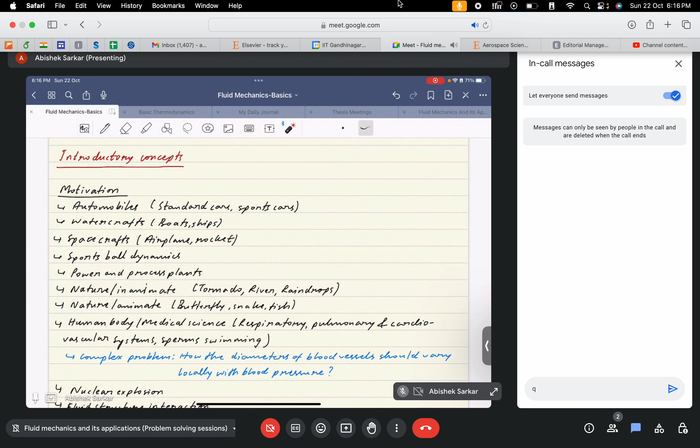I'm considering this a special session rather than a problem-solving session. This can be considered a revision session for the entire course, fluid mechanics and its applications. For today's session, I'll be revising the concepts we've discussed, touching upon important parts of the course so it helps with recapitulation—if you have time to watch a 1 to 1.5 hour video before your final exams, you can easily tackle the conceptual questions in that exam.

So with that idea in mind, I'll go through the concepts and revise the entire course as much as possible within the given time frame. If any of you have any doubt in between, you can just ask and we can discuss about it.

So to start with, we discussed the vast applicability of fluid mechanics in our day-to-day life, starting with the obvious examples such as automobiles, watercrafts, spacecrafts, sports ball dynamics and sports in general, then process and power plants.

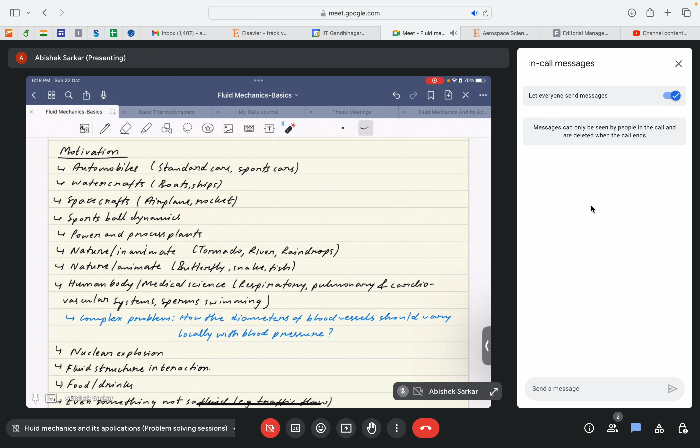Even some examples are difficult for a beginner or a layman to understand—that the concepts of fluid mechanics are still applicable in those areas. For example, in the case of the human body, nuclear explosions, food and drinks, and even something that's not so fluid, like traffic flow.

You will eventually see how even traffic flow, or the movement of cars in congested traffic, can also be modeled by understanding the concept of fluid mechanics—or rather, I must say, by understanding the concept of conservation laws.

So as a fundamental beginning thought process, to tackle any fluid mechanics problem—not with the understanding that you'll be able to completely solve it, but if you're trying to tackle it and don't have any idea how to approach it—I'll give you a trick to solve any kind of fluid flow problem: approach such problems by imposing the concept of conservation.

And by conservation I imply mass conservation, momentum conservation, and energy conservation.

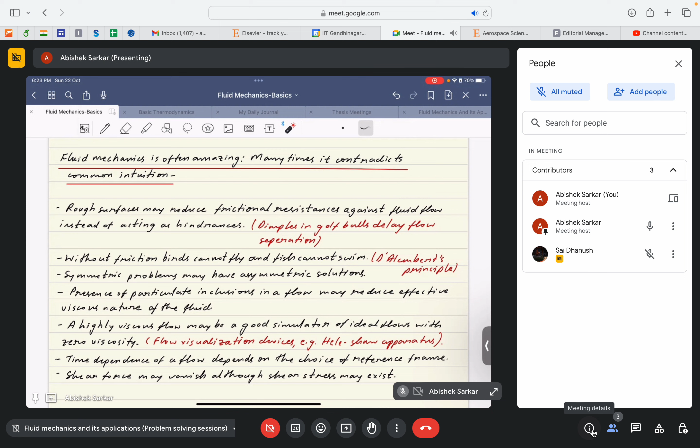So there were many terminologies that we discussed, but the first one we thoroughly discussed was the concept of continuum or continuum hypothesis. It basically means that for the applicability of the governing equations we devise for understanding fluid mechanics, that is the partial differential equations we devise for modeling fluid flows, are only applicable when the domain over which these equations are applied is continuous. And if viewed through the eyes of a layman, and considering the fluid domain to be an accumulation of small fluid particles, then the concept of continuum or the continuous nature of the domain becomes a question, right?

So, but again, as we saw, there are certain parameters we need to consider before concluding whether the continuum hypothesis can be imposed or not. The first term we discussed was the concept of Knudsen number, where the Knudsen number is given by the ratio of lambda by L, where lambda signified the mean free path of the fluid particles, and L referred to the characteristic length scale of the fluid domain. We saw that if this Knudsen number is much less than 1, then the system can be considered densely packed, and the continuum hypothesis can be easily applied.

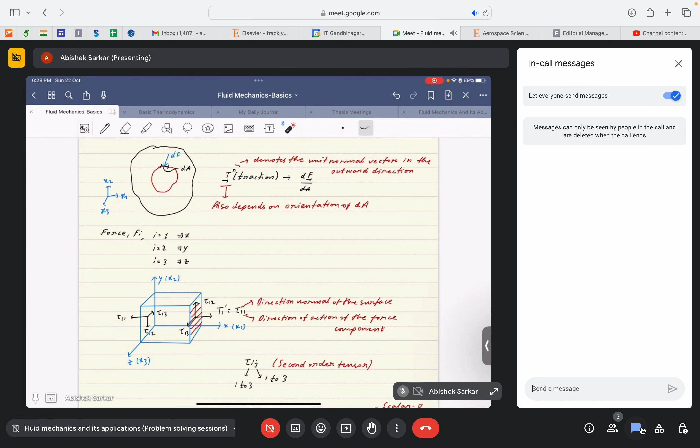So after that we basically discussed the shear stresses or the traction vector, where the traction vector is devised to represent the shear stresses that act on a fluid element in a particular direction, and that can in turn be used to define the surface force in a particular coordinate axis or direction. That's how the traction vector was defined.

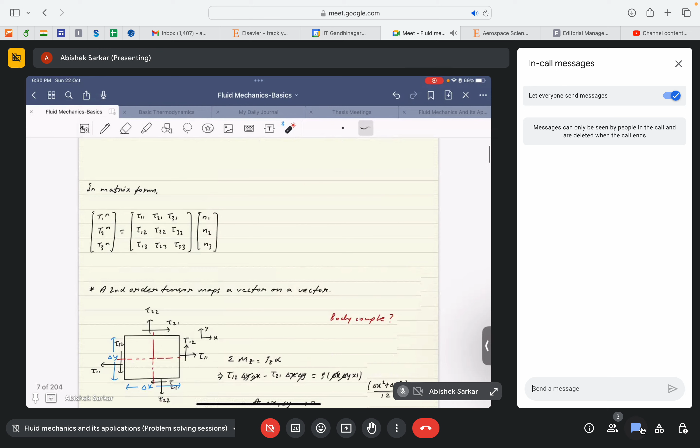And then I guess we will directly jump to the concept of pressure, where we discussed Pascal's law, which stated that the net pressure force is transmitted equally in all directions. That was Pascal's law, and we also discussed the concept of mechanical pressure and how it is different from thermodynamic pressure.

So the mechanical pressure is basically defined as the negative of the mean of the normal stresses that act on the fluid element. We also saw that in general the mechanical pressure is equal to the thermodynamic pressure. So Pm is in general equal to P thermodynamic.

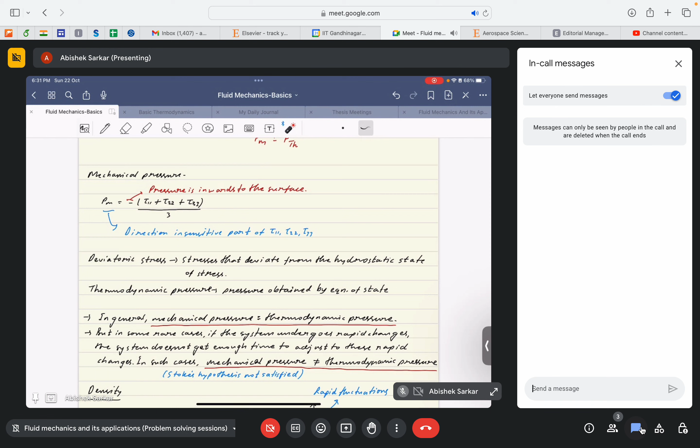But there are certain instances where this equation becomes invalid. Those instances arise when the system undergoes rapid changes, like if the forcing term or forcing scenario is such that it results in rapid changes of fluid properties in the flow domain, and the system is not able to cope up with this rapid change. In that scenario, this equation fails and is no longer valid.

And we will eventually see that this is actually an outcome of the Stokes hypothesis, where the scenario in which the Stokes hypothesis becomes valid or invalid determines when this equation is valid. When the Stokes hypothesis is valid, meaning mu, or the second coefficient of viscosity represented by lambda, is equal to minus two-thirds mu, or the fluid is incompressible, only in those scenarios does this equation become valid. We'll discuss that more when we get to the fluid dynamics part.

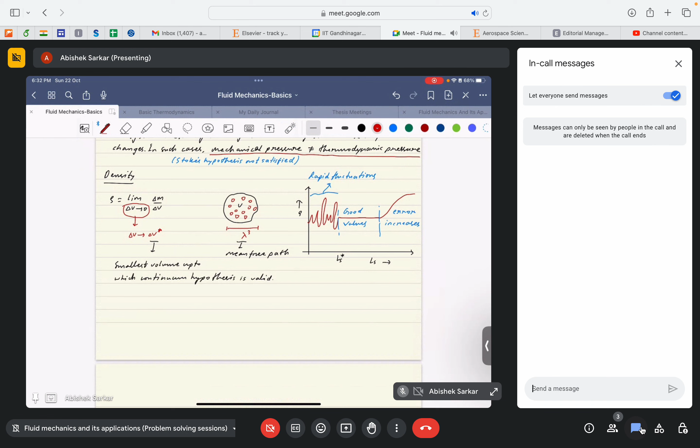Then I guess we discussed the concept of density, and how the continuum hypothesis is also imposed while defining the concept of density. I don't think I need to repeat that, it's quite simple and self-explanatory. This diagram explains everything quite properly, so I don't need to revise it again.

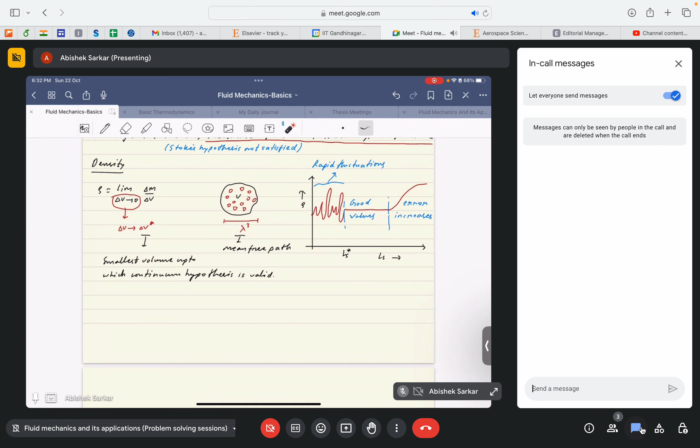So now there's an important concept, the bulk modulus. It's basically defined by this expression: the ratio of the change in pressure divided by the change in the net volumetric strain. Sorry if I mispronounced or misstated the definition. So the bulk modulus is defined as the ratio of change in pressure over the net volumetric strain.

And in the context of compressible and incompressible flow, could anyone please tell what this signifies? For incompressible flow, what must be the value of K? Should it be very high or very low?

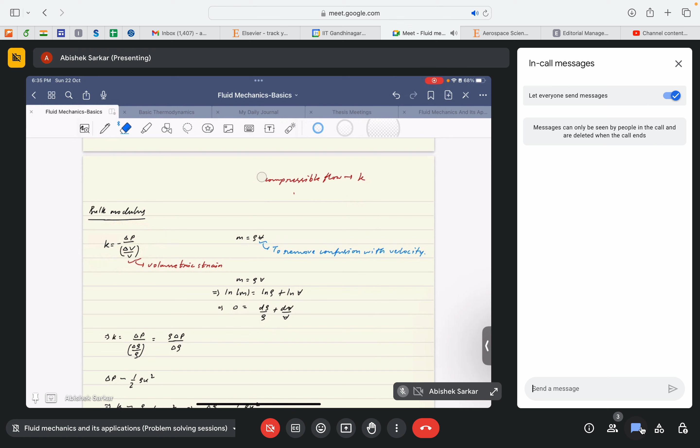We also saw the concept of Mach number, where Mach number is basically the ratio of the flow velocity over the speed of sound in that particular fluid domain. That was the definition of Mach number, and we saw that if the net change in density in the fluid flow is less than 5%, then that kind of fluid flow can be effectively considered to be incompressible. So these are the limits where the compressible and incompressible nature of the fluid flow comes into the picture.

So compressible flow can itself be considered a different subject completely, where we'll see how the very fundamental understanding of fluid mechanics contradicts the usual observation. Not always, but there are certain scenarios where the fluid behaves in a completely different way than in the subsonic regime. This abrupt change in the behavior of fluids is very much governed by this parameter known as the Mach number. If Mach number is larger than 1, or basically in the supersonic regime, the fluid behaves differently compared to when it's in the subsonic regime. This change in characteristics is governed by the Mach number of the fluid flow. This is important, but if you're interested, you can look up the compressible flow chapter of any standard fluid mechanics book for more understanding.

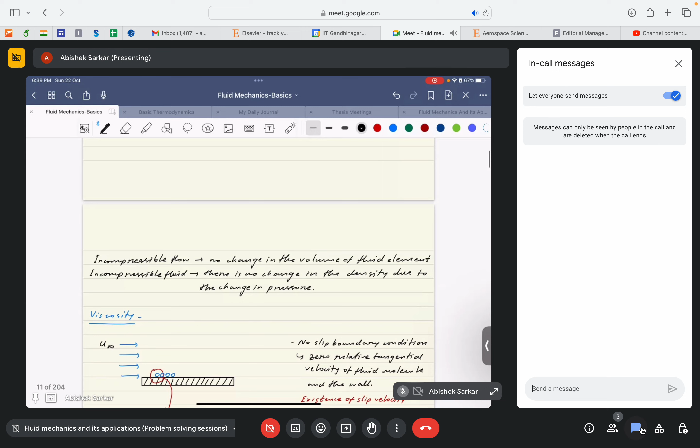So then we stumbled upon the concept of viscosity, which is again very crucial, at least in the context of subsonic flow regime, or basically for this course where we are mainly dealing completely in the subsonic regime. Viscosity by its very nature inherently opposes the direction of the flow. Similar to friction in solids, where friction of surfaces opposes the direction of motion of the object above it, you can understand viscosity as a frictional resistance in the case of fluid flow, where it resists the motion of fluid over a particular surface.

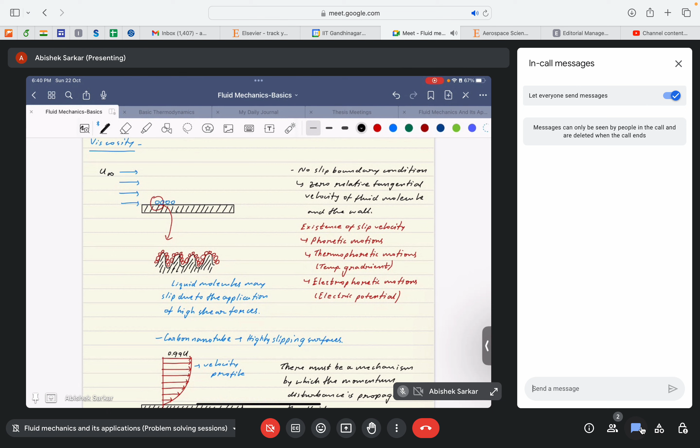In scenarios where we consider the fluid to be viscous, the no-slip boundary condition remains valid. This implies that the net tangential velocity above the surface would be equal to 0 at the wall. So if we consider this to be the wall, the net tangential velocity above this wall can be considered to be 0 in the case of viscous flows.

We also saw, while discussing Euler's equation or the potential flow regime, that this no-slip boundary condition becomes invalid because the governing equations become singularly perturbed. The second order terms are removed since we're not considering the viscous nature of the fluid flow. So the sets of boundary conditions defined by the second order nature of the governing equation become invalid, and only one set remains: the no-penetration boundary condition, in the case of potential flows.

I won't go too deep, but there was one very important concept regarding non-viscous fluids and inviscid flow. The thing is, there is no fluid in this entire world which has viscosity equal to 0. If somebody tells you the viscosity of the fluid can be taken to be 0, that's completely rubbish. There is no physical meaning to that statement. Viscosity is a property of the fluid, so if there is a fluid, and if you are defining a fluid, there must be a certain viscosity. We cannot say the viscosity of a fluid is 0.

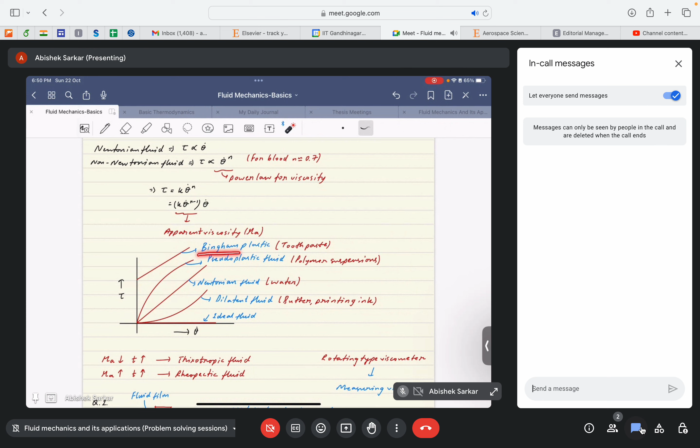So it's also a non-Newtonian trend, even though the trend of variation is the same, but it's different from water. There is a certain threshold for shear stress that has to be crossed for the fluid to start moving. This is basically what is meant by Bingham plastic. I guess we can move ahead.

Let's take this example based on the viscosity of fluid. This setup is for flow between two cylinders, considered a specific setup, and such flows are known as Taylor-Couette flows - basically flow between two rotating cylinders. In this question specifically, the outer cylinder is moving with angular velocity omega, and the inner cylinder is fixed, where the radius of the inner cylinder is r1 and the radius of the outer cylinder is r2.

So in this question, we are asked to find an expression for M, the net moment required to rotate the inner cylinder against the resistive forces because of the viscosity of the fluid within this confinement. We need to find the expression for the net moment required to move this inner cylinder.

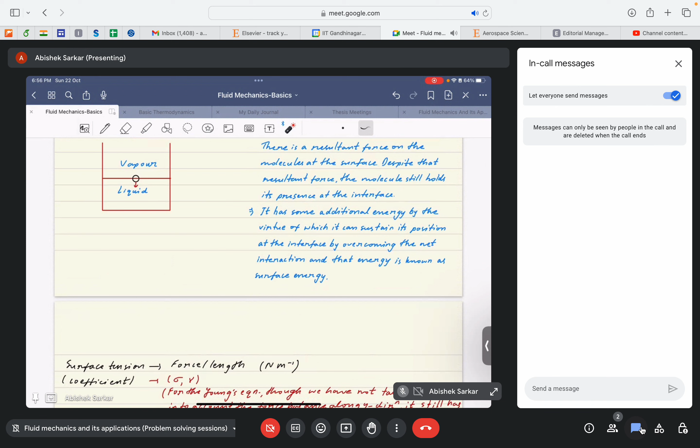Surface tension is the net force per unit length required to resist this breakage of these liquid bubbles, and such forces per unit length is defined as surface tension, which is denoted as sigma.

Then we looked at some specific cases for the expression for excess pressure. For example, for the case of a spherical droplet, the expression for excess pressure was given by 2 sigma by r, where r is the radius of the bubble. Then in the case of a spherical bubble, the excess pressure was given by 4 sigma by r — just twice the value of excess pressure for a spherical droplet.

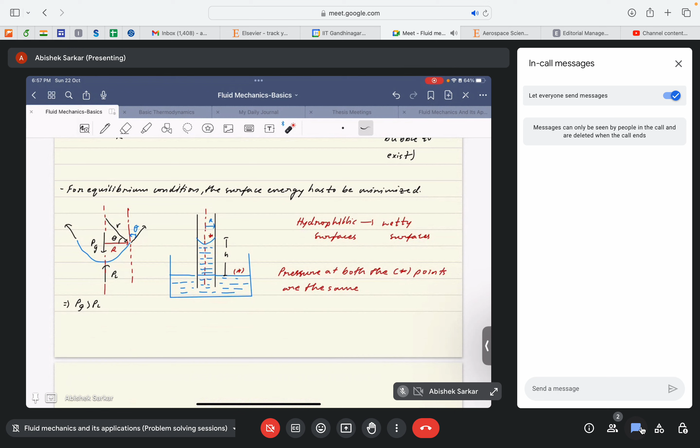Finally, we saw the application of surface tension in the case of capillary rise, where the expression for the capillary rise was given by h equals 2 sigma cos theta by rho g r, where r is the radius of the capillary tube. This applies in the case where the meniscus is under static equilibrium, and the contact angle is acute.

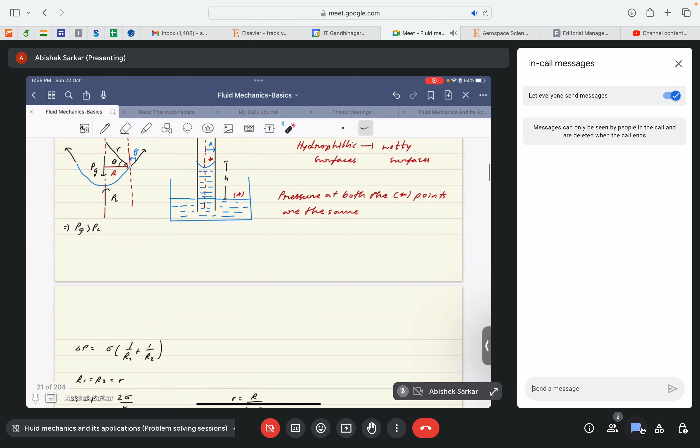I will just cross verify — yes, the contact angle is acute. So if it is greater than 90 degrees, then the expression changes, and it is given by this expression.

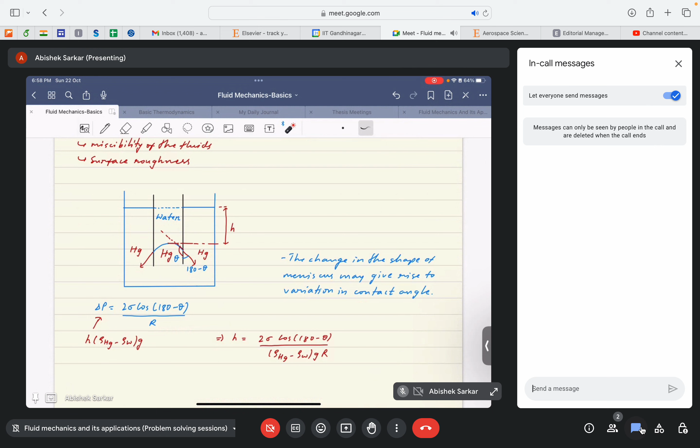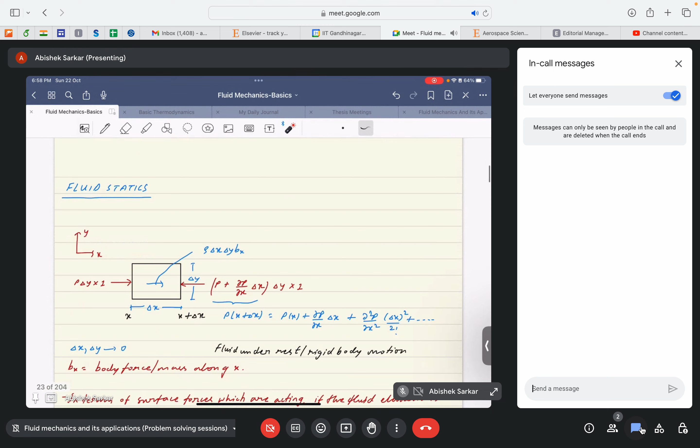Now we discuss fluid statics. We started with the hydrostatic law, which basically gives the expression for how, if the fluid is static, the pressure varies along the depth in the fluid.

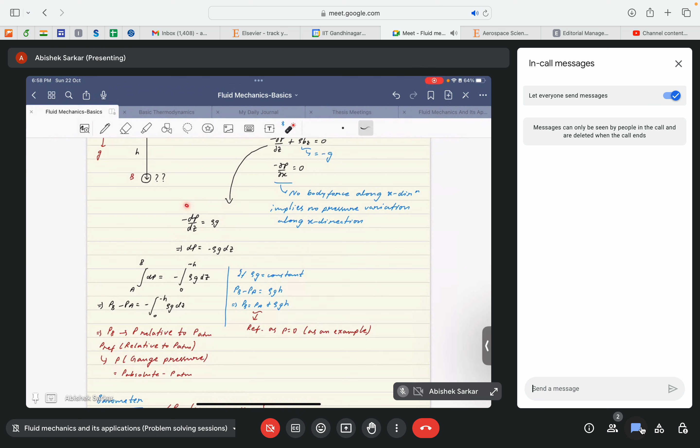This expression also helped us define the concepts of relative pressure and gauge pressure, atmospheric pressure, absolute pressure, where gauge pressure is basically the difference between the absolute pressure and the atmospheric pressure.

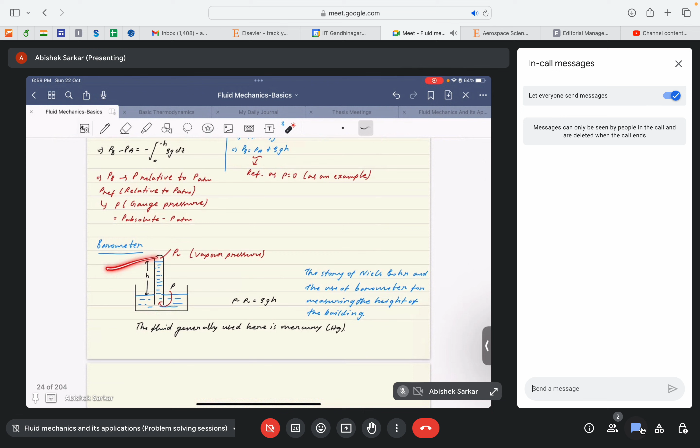Then we also discussed different pressure measuring devices such as barometers, manometers, and piezometers, and most extensively we discussed the working principle of manometers, and we also saw various problems.

In the case of manometers, initially it may seem very complex and difficult, but in reality it's very simple. It's basically the balance of pressure about a certain datum point.

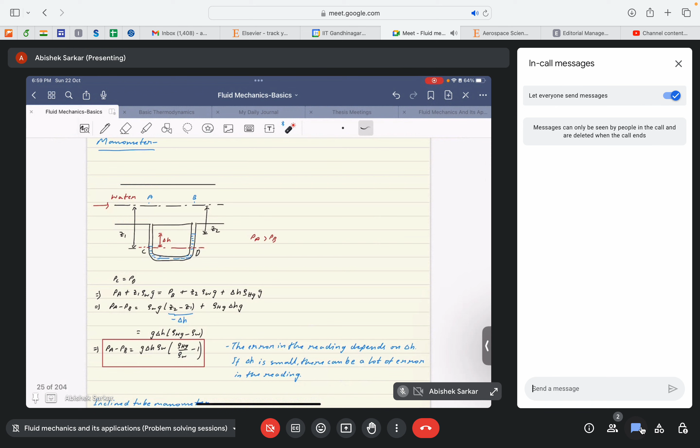Let's consider this example. If you want to measure the pressure difference between these two points A and B, this pressure difference arises because of the incoming flow. Or, since you already know, you can tell this flow is actually generated because of the pressure difference.

This is basically the negative pressure gradient. If dp by dx is negative, there will be flow in the positive x direction, as we discussed thoroughly while deriving the exact solution of the Navier-Stokes equation.

We also discussed, while covering boundary separation, how the presence of a negative pressure gradient resembles a favorable flow condition with no boundary separation, and in the case of adverse pressure gradients, where the pressure gradient is positive, it may result in flow separation in the boundary layers.

I'm telling you this because you have already covered the entire course, so this is understandable. We initially didn't discuss it because we hadn't reached that point, but since we've now completed the entire course, for revision it's good to correlate the different concepts we discussed throughout.

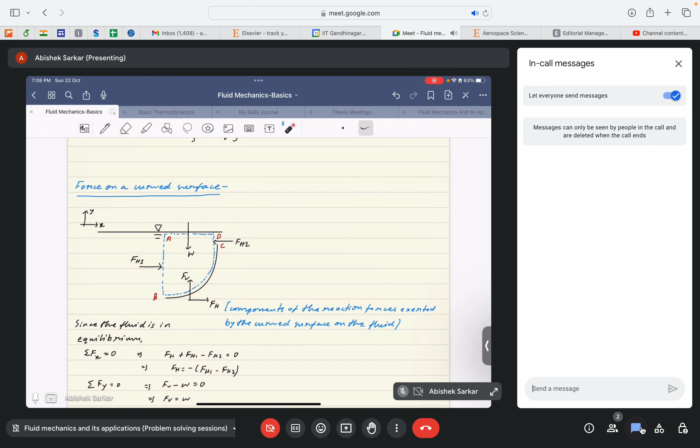For the net vertical forces, it's much simpler: the net vertical force is exactly equal to the net fluid weight supported by this curved surface. This is one of the crucial points we follow before solving problems based on net forces acting on a curved surface.

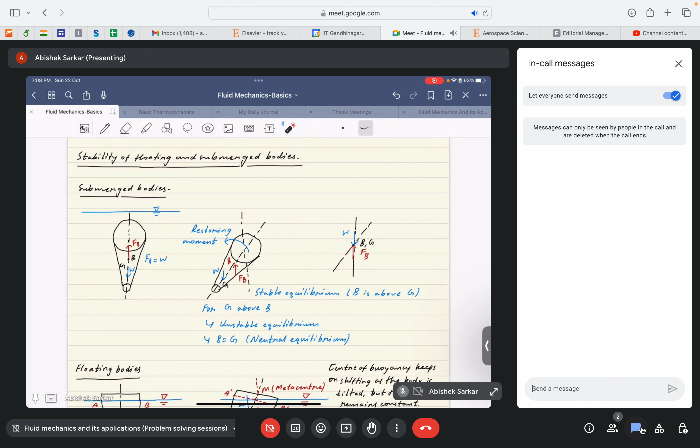We also discussed the stability of floating and submerged bodies. In the case of floating bodies, the concept of metacenter came into picture.

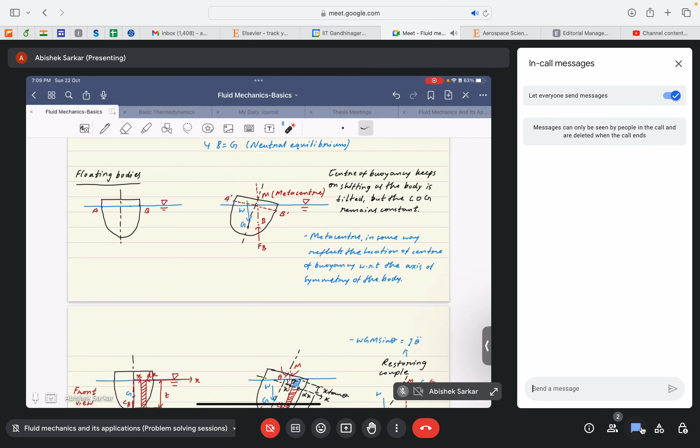I won't define metacenter again, but if there's a crucial 1 or 2 mark question, stability is determined by the metacenter of the body. For stability of floating bodies, the metacenter should lie above the center of gravity of the object. If M is above G, the floating body is considered stable. If the metacenter is below G, the floating body is unstable. And if the metacenter coincides with the center of gravity, the body is neutrally stable, tending to remain in that particular orientation throughout its motion.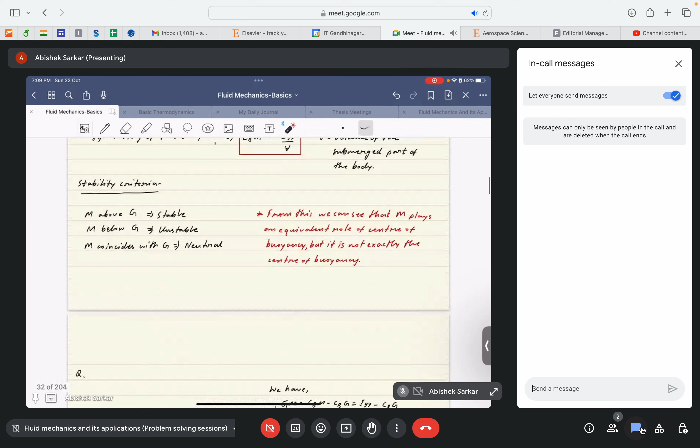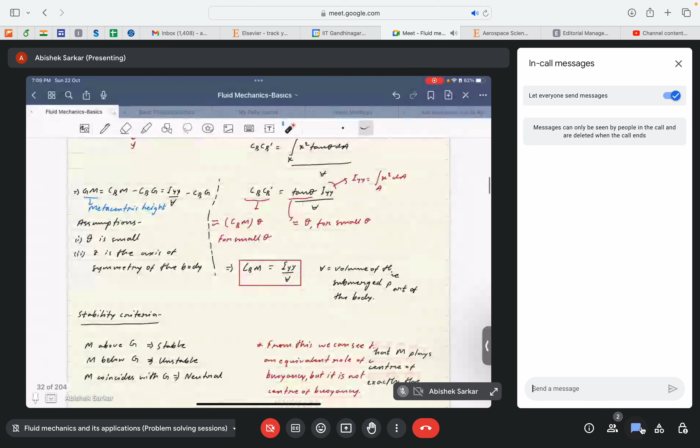For metacenter, we follow this expression - the metacentric height or metacenter is given by this expression. Then I guess we can move forward and discuss other topics because time is limited, so we need to cover many topics.

Now we come into the fluid kinematics part. This is a very important topic where we discuss the concept of streamlines, streak lines, and path lines - basically the flow visualization part. We saw how flow is visualized with the help of different imaginary as well as real lines. In our context, the imaginary lines were the streamlines, and the real lines were the streak lines.

We saw how these different kinds of lines help in the visualization of the flow field, and we also saw that in the case of steady flows, the streamlines, streak lines, and path lines coincide with each other and are identical. We also discussed steady and unsteady flows and their basic definitions, so I won't go over that again.

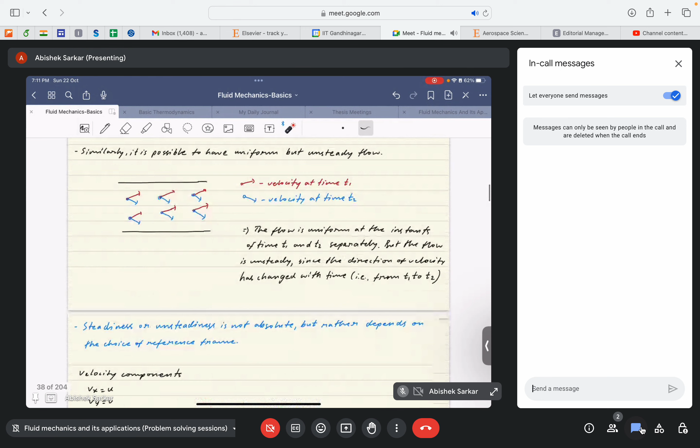While discussing streamlines - by definition, streamlines are the imaginary lines in the flow field such that the tangent to these lines at any point represents the net velocity of the fluid particle at that point, at that given instant of time. These are instantaneous lines, not time-averaged lines, but lines that change at every particular instant of visualization. More importantly, these are imaginary lines.

So in general, if you're observing certain lines because of the application of dye in a particular flow, these are not streamlines, but are actually streak lines. This is seen by the definition that a streak line is the locus of all fluid particles which at some prior instant of time passed through a common point. The famous experiment of Reynolds, where he used dye to visualize the motion of fluid particles in that tube - those lines were actually streak lines, not streamlines. These are not to be confused.

But he conducted his experiments in a very properly designed environment where there were no high degree of perturbations in the flow field, and the flow can effectively be considered steady. In those scenarios, we can tell that the streamlines, streak lines, and path lines coincide with each other, and we can say that the streak lines we observed are the same as the streamlines of the flow field. So that's the scenario.

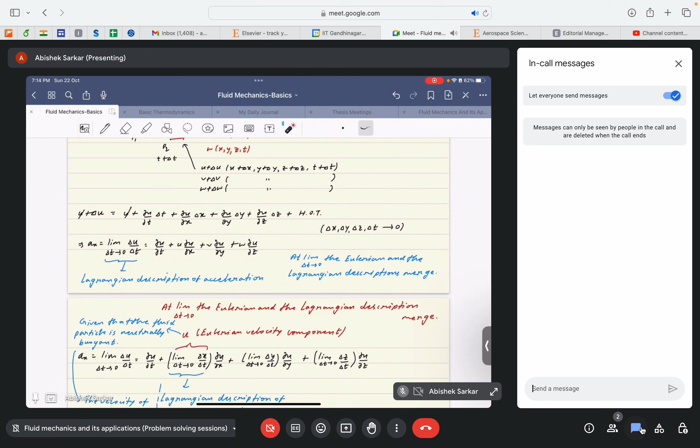Okay, so we then again saw the equivalence of the Eulerian and Lagrangian approach, but I don't think we have enough time to discuss through everything.

Since the concept of total derivative came into picture, the total derivative was defined as a particular mathematical operator, given by the complete derivative d by dt, which was the sum of the local derivative dou by dou t plus the term v dot nabla, where nabla denotes the operator given by nabla equals dou by dou x i-cap plus dou by dou y j-cap plus dou by dou z k-cap. Okay, this expression.

But one more key point, this expression is in vector form, so it's valid for any coordinate system. But if we are considering a Cartesian coordinate system, then this is what the expression for complete derivative is. If you consider a different coordinate system, like cylindrical or spherical, then the expression for v dot nabla will change accordingly, because of the definition of the nabla operator in different coordinate systems.

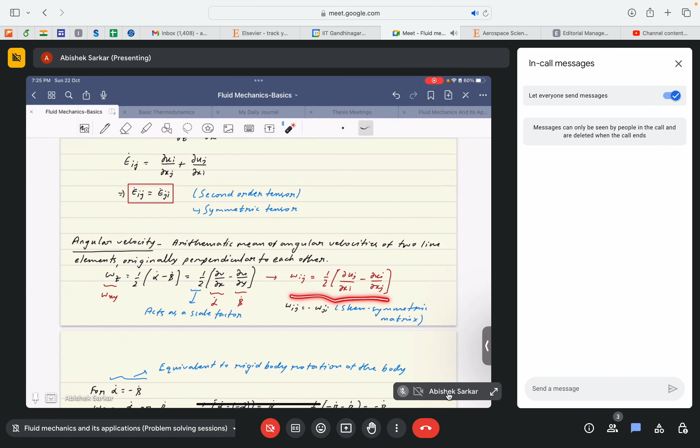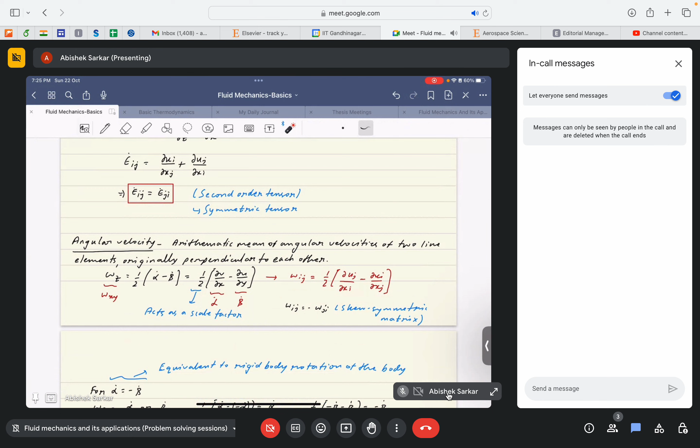This expression is actually the index notation for all the nine elements in the tensor for the angular velocity as well as the linear angular strain rate. For right now, for the context of this course, I don't think it's necessary to understand the index notation, but these are the index notation for the various elements of the angular velocity tensor as well as the shear strain rate tensor.

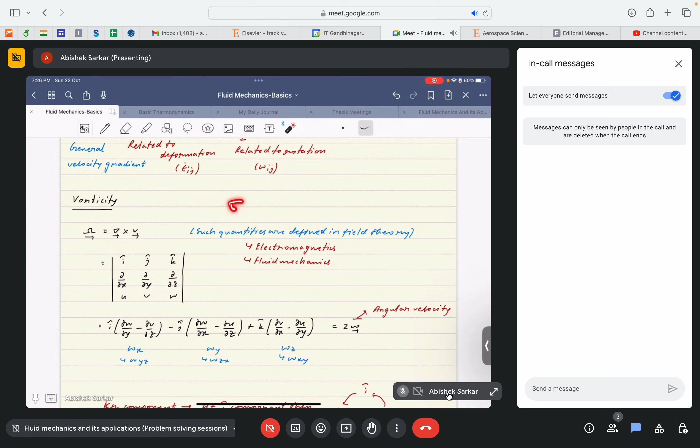Then again we discuss vorticity, where vorticity is given by the curl of the velocity field. If the flow field is irrotational, then the value of the vorticity would be equal to 0, basically del cross V equal to 0, where del is the nabla operator.

We also discussed a very important concept, the stream function, which is valid for a steady incompressible 2D fluid flow. In the case of a 2D incompressible fluid flow, the mass conservation equation takes the form dou u by dou x plus dou v by dou y equal to 0 — like any of the two, u or v, v or w, or u or w — but say w is equal to 0 in this context, then the mass conservation equation takes this form.

Also, since it's incompressible, dou rho by dou t is equal to 0. Keeping that in mind, if in this equation we substitute u equals dou psi by dou y and v equals minus dou psi by dou x, then this equation would inherently satisfy the mass conservation, and thus we can define the net flow field in terms of a single variable which is a function of x and y. I'll reiterate that the existence of a stream function is only valid for a 2D incompressible flow field.

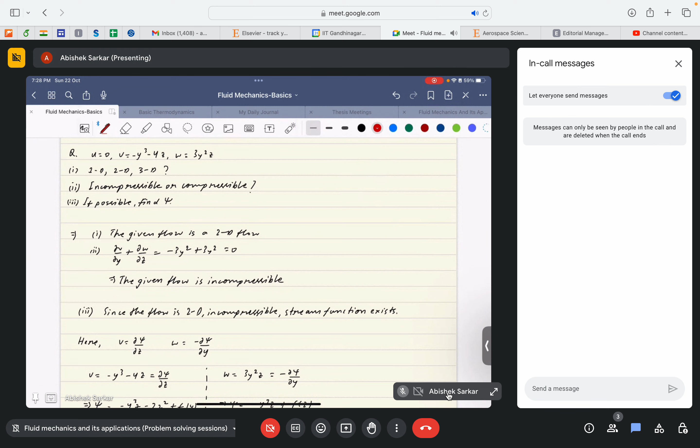If phi is the potential function, then u is given by dou psi by dou y as well as dou phi by dou x, and v is given by minus dou psi by dou x and dou phi by dou y, where this is valid for a 2D incompressible flow, and one more criterion is required, that is irrotational.

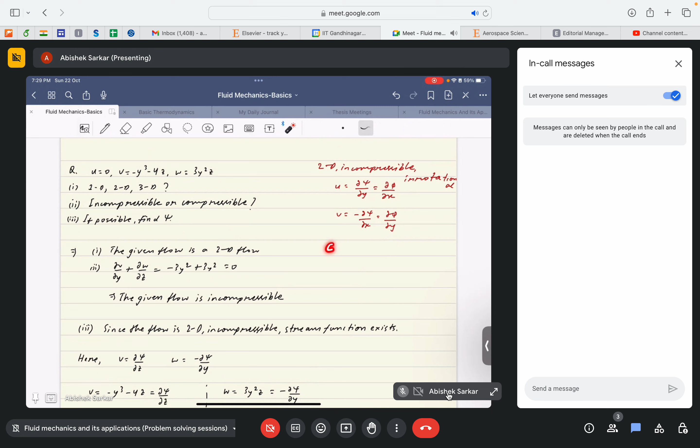So if these three criteria are satisfied, then we can say that the potential function and the stream function satisfy the Cauchy-Riemann conditions.

I am just reiterating this because I don't think I will be able to cover the potential flow part in our present revision session, but just for you to recapitulate.

In potential flow theory, where the flow is 2D, irrotational, and incompressible, we devised an algorithm to visualize the flow field: first we find the potential function. Why? Because it's quite easy to find, since the governing equation is quite simple, given by del square phi equal to 0, basically the Laplacian equation. Since this equation is valid, we can easily solve for phi.

Solve for phi, find the velocity fields. Since we already know phi, we can again find the expression for psi from this relationship, which can again help us in visualizing the flow field.

Why are we solving the equation for phi? Because solving for phi was much simpler compared to solving for the stream function. So first we solve for the potential function, then find the stream function from the respective relations, and then we can visualize the flow, because psi was easy to visualize compared to phi, and gave much more information about the flow field compared to phi.

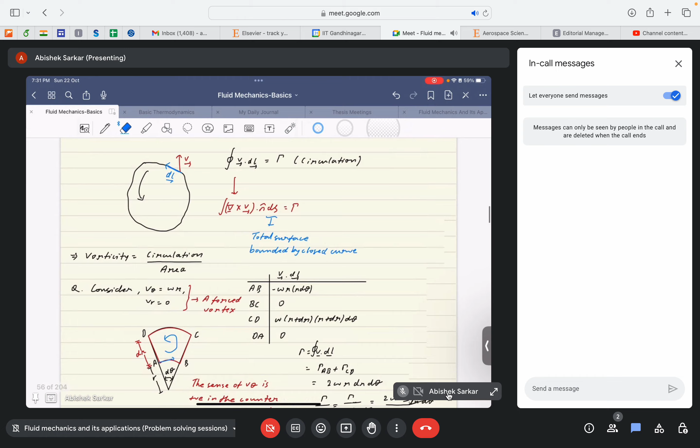I can skip the problems because we have discussed thoroughly many problems already. So now we discuss the dynamics of inviscid flow, basically the Euler equations.

We are not considering the viscous term, so the governing equation reduces to the Euler's equation. This is the governing equation, termed as Euler's equation, which has the inertia force term, the body force term, and the pressure forces, while the viscous terms are neglected.

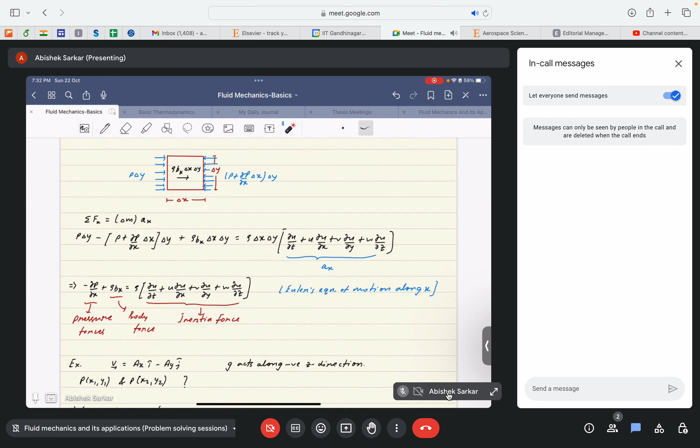We also saw that if we impose certain special cases or assumptions in this equation, it in turn reduces to the Bernoulli's equation. The Euler's equation is the most generalized form of the governing equation for inviscid flows, but if we impose certain criteria or assumptions, this equation reduces to the Bernoulli's equation, which is quite simple in its form.

Let me just go to this section. We saw that if we impose these four conditions—inviscid flow, steady flow, constant density, and that the two points considered are along a streamline—then the Euler's equation reduces to the Bernoulli's equation.

We also saw that if we impose one more condition, that del cross V equals 0, meaning the flow is irrotational, then the two points where we apply Bernoulli's equation can be at any two points in the flow field, and do not necessarily need to lie on the same streamline. So this is one important conclusion.

We basically saw that Bernoulli's equation states that the sum of the net flow energy, kinetic energy, and potential energy between any two points along the same streamline in the flow field remains constant, given that the flow is steady, incompressible, and inviscid.

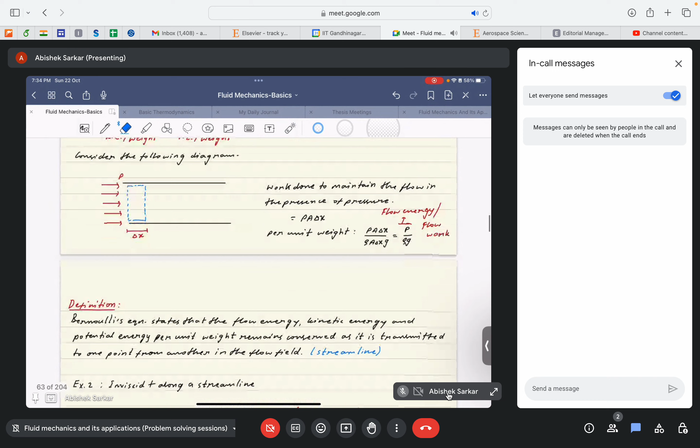There are again some specialized forms of Bernoulli's equation, so you can just refer to the notes that I have shared.

We solved some problems, but as I said, I won't solve any problem for today's session. It's just a revision session, so that you can recapitulate the various concepts that we've discussed.

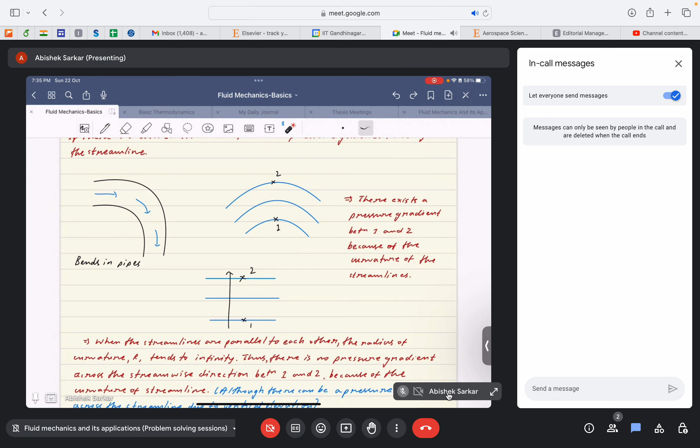There are lots of examples that we solved regarding Bernoulli's equation, so I guess I'll just skip that. We also discussed about siphons.

For revision, let me just take this example. If we consider such an arrangement where one end of the pipe is at the surface of the liquid we want to extract, and the other end of the pipe is at an elevation lower than the elevation of the surface of the fluid, then we apply Bernoulli's equation between points 1 and 2.

Point 1 lies at the surface of the fluid near the inlet of the pipe, and point 2 lies at the highest level of the pipe.

Then if you apply Bernoulli's equation between these two points, we find that P1 by rho plus V1 square by 2 plus GZ1 will be equal to P2 by rho plus V2 square by 2 plus GZ2. And since P1 is equal to PATM, if we consider only gauge pressure, that can be cancelled out.

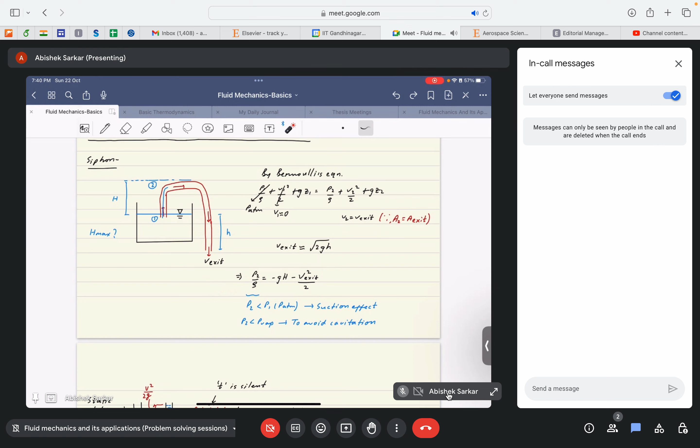So that's why the importance of Bernoulli's equation comes into picture. Even if it's a very idealistic governing equation, still in certain scenarios it gives a very good approximation of the real trend of variation of the flow parameters.

Then we also discussed various flow measuring devices: venturimeter, pitot tube, and orifice meter. We saw that the venturimeter and orifice meter are primarily used for measurement of the net flow rate in that particular device, and pitot tube is used specifically to measure the flow velocity in that particular flow device. That was the main difference in the applicability of the venturimeter, orifice meter, and the pitot tube.

I guess I won't go again into the application of venturimeter, so I guess that's fine.

Okay, you can just stop here and discuss the angle of the cone angle for the venturimeter, like why this is quite low, very small in the diverging section.

As you already know by now, this angle is kept very low so that flow separation cannot take place in these regions, because we will see that if this angle is very high, and since the flow is experiencing an adverse pressure gradient.

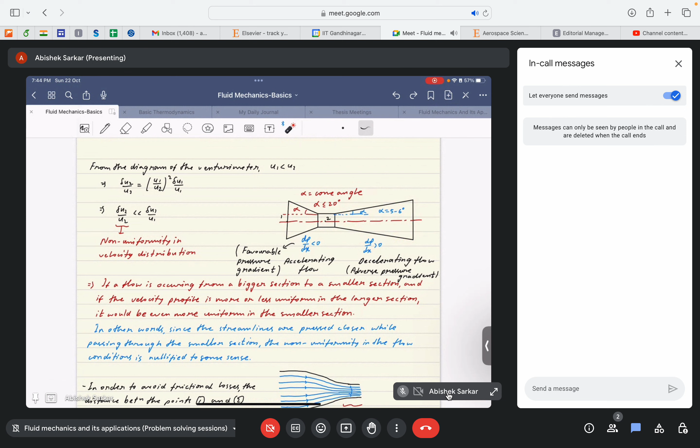In order to avoid that, this cone angle is kept as small as possible so we can avoid flow separation due to this adverse pressure gradient. The adverse pressure gradient will still be there, but flow separation can be dealt with if the cone angle is made as small as possible, and standard values vary from 5 to 6 degrees.

So I guess that's all. Then we discuss the orifice meter, so I'll skip that. As I was just mentioning...

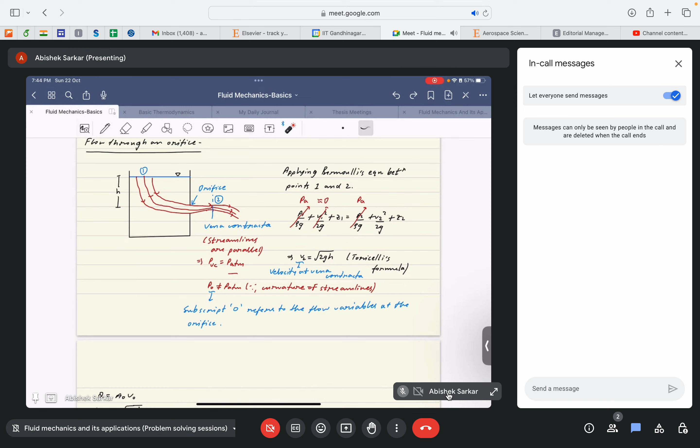In the case of an orifice, the exit velocity can also be given by root 2gh, and thus it's a very good approximation for velocities in the case of the exit velocity for a siphon. It's not exactly the same, but it's a very good approximation. That's what I wanted to emphasize.

I guess I'll skip ahead, and now this will be the last part for today's revision - basically the integral forms of the governing equations.

Here we discussed the RTT, or the Reynolds Transport Theorem, and saw how important this theorem or transformation is, because most of the conservation equations - mass conservation, momentum conservation, or energy conservation - are devised for a control system, a definite system.

A definite system is a particular mass, where the identity of the system or the molecules within the system remain the same - this is basically the control system approach. So all the governing equations were initially devised for a control system approach.

But since in fluid mechanics we want to deal with such problems from the Eulerian point of view, we needed a mathematical transformation to convert these classical equations, initially devised for control systems, into a control volume form. That's why the RTT was devised.

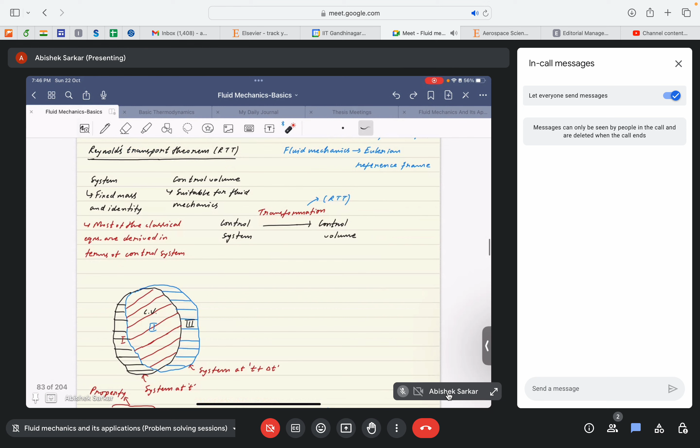We saw that the general form of RTT is given by this equation, where capital N denotes the fluid parameter that you want to conserve - that can be mass, momentum, or energy - and small n denotes the intensive value of that particular property.

Basically, it means the value of the property per unit mass. So in the case of mass conservation, capital N would be equal to m, and small n would be equal to m by m, which implies small n is equal to 1.

Since mass can neither be created nor be destroyed by its very definition, the rate of change of mass is equal to 0 in the case of the control system approach. Thus the net mass conservation equation in the Eulerian context is given by this expression: d/dt of the volume integral of rho dV plus the surface integral of rho Vr dot n-cap dA equals 0. This is mass conservation in the Eulerian perspective.

Here Vr is actually the velocity of the fluid with respect to the control volume. The control volume may be moving and may be deformable, and since the control volume is moving, Vr would imply the velocity of the fluid with respect to the control volume. That's what it is here.

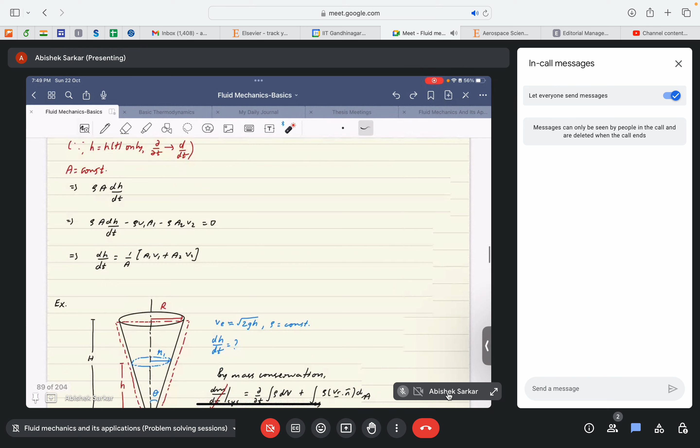Similarly, we also saw the conservation of linear momentum, where capital N in that context equals mv, and small n equals v, because mv divided by m gives us v. So small n is equal to v. Substituting N equal to mv and n equal to v, we get this expression.

Here the left hand side, the control system part, basically denotes the net force that acts on the body. This net force can comprise both surface forces and body forces. We saw examples of each: surface forces comprised the pressure forces and various viscous stresses in the case of fluid flows, while body forces comprised forces such as the force due to acceleration due to gravity or electrostatic forces. These are the distinctions between surface and body forces.

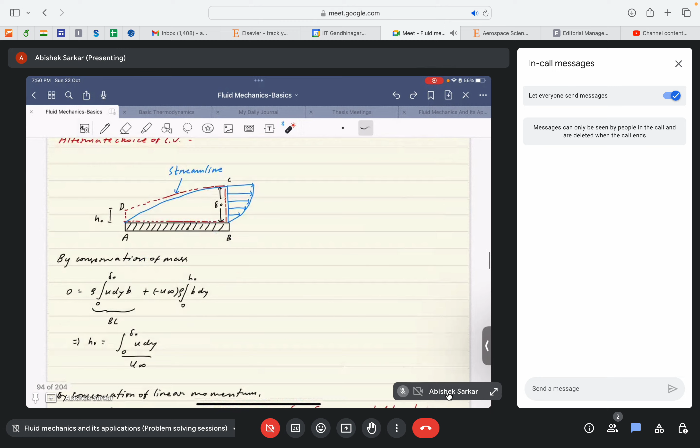Once you substitute the form of the surface and body forces into that equation, and impose the condition that the fluid you're dealing with is a Newtonian fluid, we finally arrive at the Navier-Stokes equation. I guess we will eventually see this here. I'm just skipping past the examples we already dealt with, so just go through it.

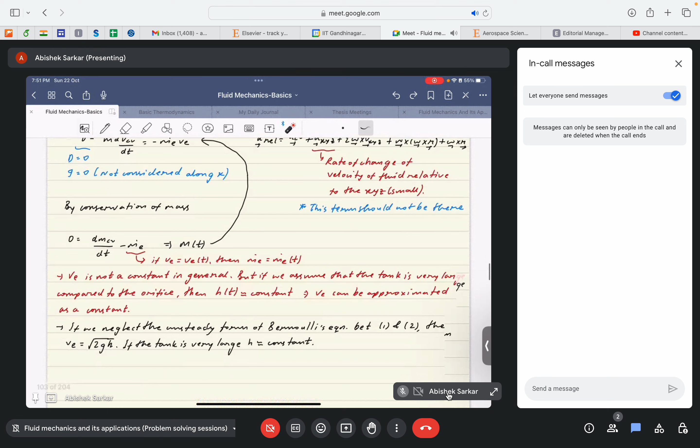We also discussed angular momentum, but for the sake of time I will skip that part.

As I was mentioning, if you substitute the form of the body force and surface forces into the expression we derived after imposing the RTT in the momentum conservation, we arrive at this form of the equation. Here, not to be confused, these are index notations used to define the momentum conservation equation, which is also known as Navier's equation or the Cauchy's momentum equation.

If we represent the shear stress in terms of the shear strain rate by applying Newton's law of viscosity, substituting tau-ij equal to 2 mu Eij, this equation reduces to the Navier-Stokes equation. If instead we substitute a different constitutive relationship for stresses, say tau-ij equal to mu Eij to some exponential power, the equation is different—it's not the Navier-Stokes equation but the Cauchy's momentum equation. So the Navier-Stokes equation is actually a special form of the Cauchy's momentum equation.

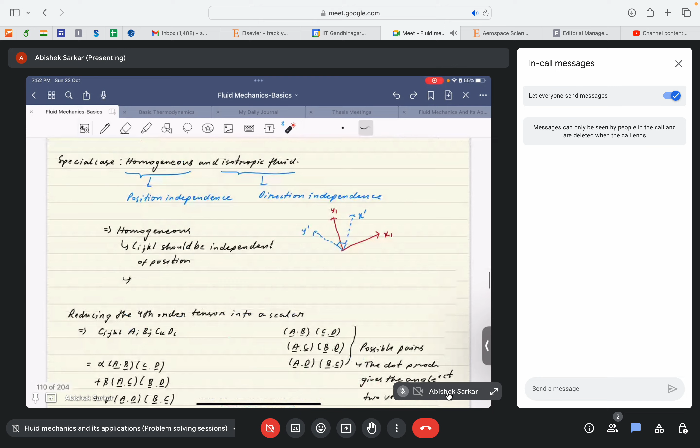This is the form which we usually solve for most of our fluid flow problems that we dealt with in this course. So now I guess I can directly go to the boundary layer theory.

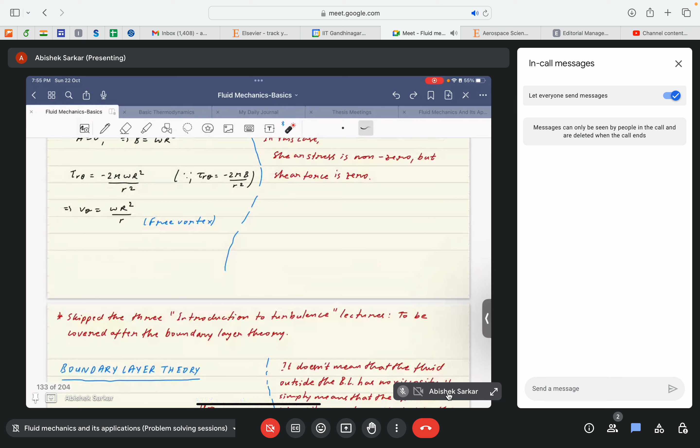Let's directly deal with the boundary layer theory. We saw how the boundary layer theory was developed by Prandtl in order to overcome D'Alembert's paradox, which stated that the net drag force in the case of a bluff body is equal to 0. But this is actually not true, because in the case of bluff bodies, the net drag force is actually of the order of 1 compared to the lift forces.

That was contradictory to what was actually observed in the real scenario. So to overcome this paradox, known as D'Alembert's paradox, the boundary layer theory was devised, which stated that most of the viscous effects in the case of high Reynolds number flow were confined to a very thin layer attached to the surface of the body. This thin layer is known as the boundary layer, where velocity gradients are considerably high, and the thickness of this boundary layer is given by an expression.

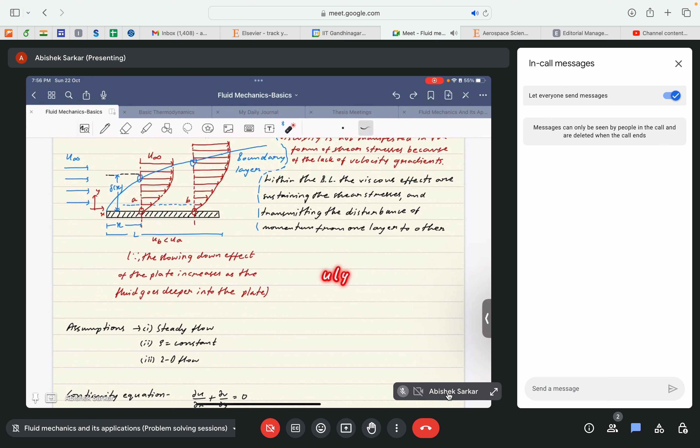This is defined by the point in the flow field where the velocity of the flow is 99% of the incoming free stream velocity. So this is basically: u at y equal to delta would be equal to 0.99 of u infinity. This is the definition of boundary layer thickness.

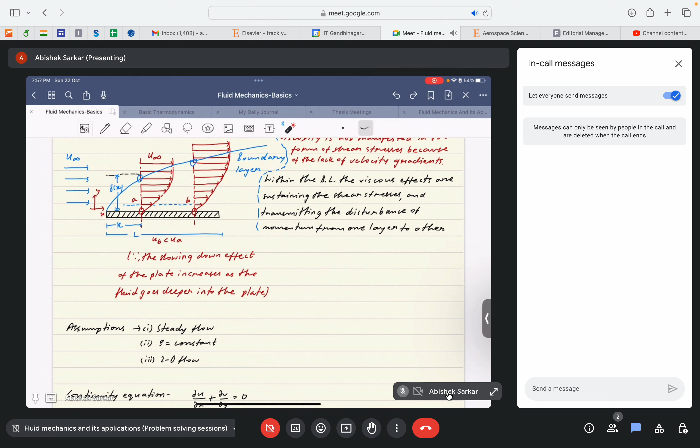To derive the boundary layer equations, we consider a 2D form of the governing equation, assuming that the net variation along the z direction is negligible, assuming that the depth along the z direction is very high compared to the boundary layer thickness.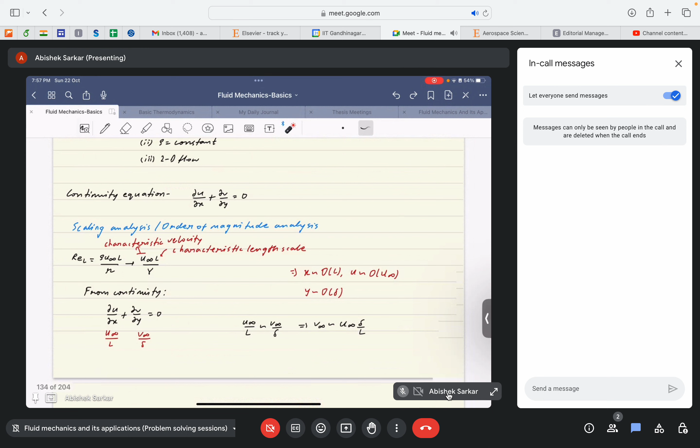Keeping that idea in mind, we solved the 2D form of the Navier-Stokes equation. Then we imposed a particular scaling to these terms. This is comprised of the Buckingham Pi theorem and scale factor analysis. I'm skipping that part, but here we scaled the various flow parameters with respect to the various characteristic scales.

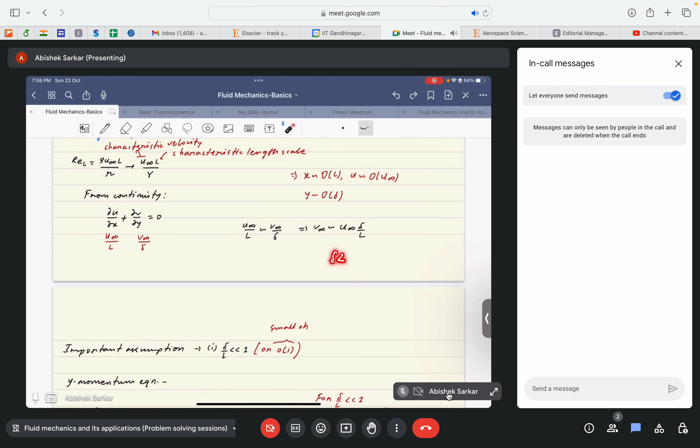In the case of the y-axis, we scaled it as the boundary layer thickness. So from the continuity equation, we concluded that the free stream velocity along the y direction is given by u infinity delta by L, from which we can easily tell that the magnitude of the free stream velocity along the y direction is much lower than along the x direction, because delta is much less than L. This relation is an outcome of the fact that Reynolds number is much higher than 1.

We scaled the respective momentum equations along the y direction and the x direction, from which we saw that scaling the momentum equation along the y direction gave us the conclusion that the net pressure variation along the y direction is almost equal to 0.

So basically within the boundary layer, pressure is only a function of x. Okay, that is what we basically got. So after scaling the...

The x momentum equation, after scaling, gave us this final form: u du/dx plus v du/dy equals minus 1 by rho times dp_infinity/dx plus nu times d-square u/dy-square, where this expression is an implication of the y momentum equation. So we again saw this as the general boundary layer equation.

Now, if we impose the case of flow over a flat plate, where the incoming free stream velocity is actually a constant and does not vary with x, then this pressure term gets cancelled out.

So the final form of the x momentum equation was given by: u du/dx plus v du/dy equals nu times d-square u/dy-square.

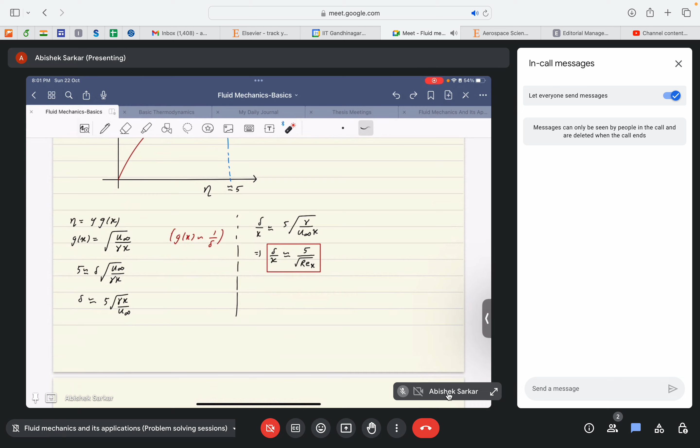So that's the conclusion we got from the Blasius solution. Then, using the same relations, we found the expression for the skin friction coefficient. Finally, we discussed momentum integral methods for boundary layer analysis, where we initially guessed a particular form of the velocity profile.

We then substituted it into the von Karman equation to find the shear stress acting on that particular surface. So that's what we saw.

The von Karman equation was given by this expression, where to find the net shear stress acting on the wall, we initially guess a velocity profile which is usually a third degree polynomial with respect to velocity.

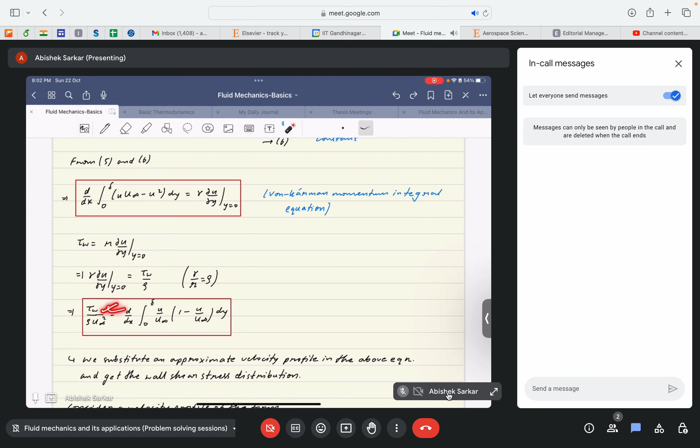So we substitute that expression, and obviously that third degree velocity profile has to be imposed with appropriate boundary conditions. Once we substitute this velocity profile into the expression, we can find the shear stress. So this is the main concept behind the von Karman momentum integral equation.

So this is what we have discussed, and this is what I meant by a third degree velocity profile.

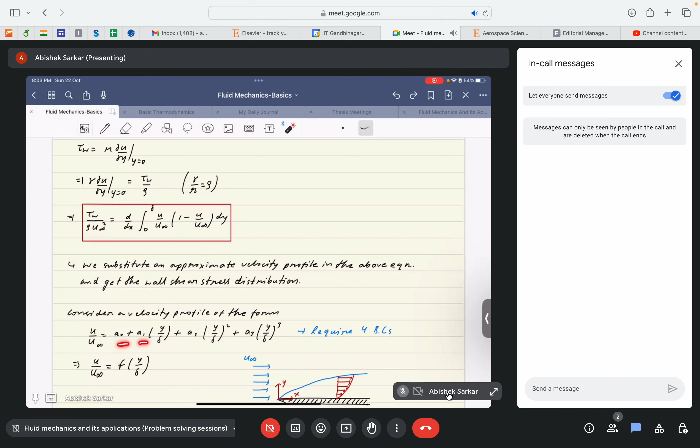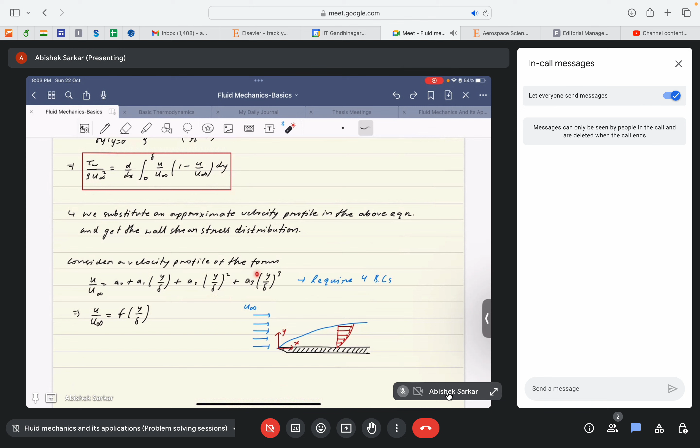You can consider a velocity profile of this form, which would have four constants: a0, a1, a2, a3. Impose the required boundary conditions, which must correspond to certain physical conditions, and then find these coefficients to get the velocity profile you initially guessed. Substitute this velocity profile into the expression to find the net shear stress.